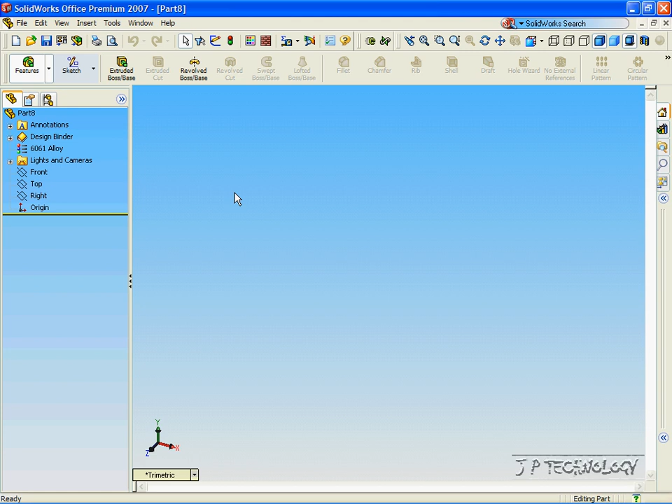So to start off, let's sketch something on the front plane. Click Front Plane, click Sketch, click Circle, and let's bring it to the left, and make it go to the origin. Click OK, and let's make this circle 50 millimeters.

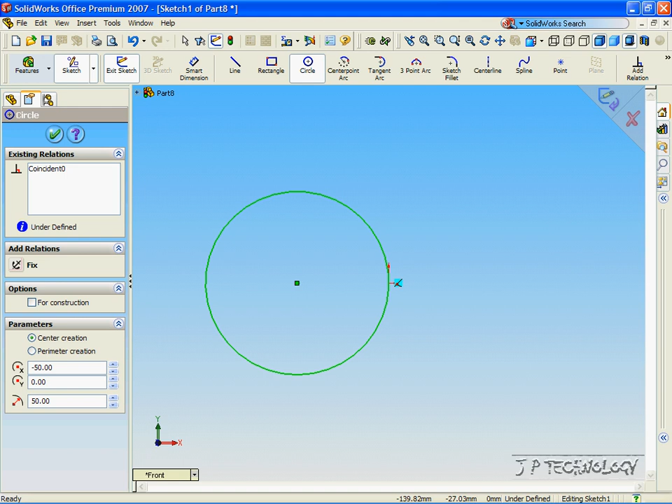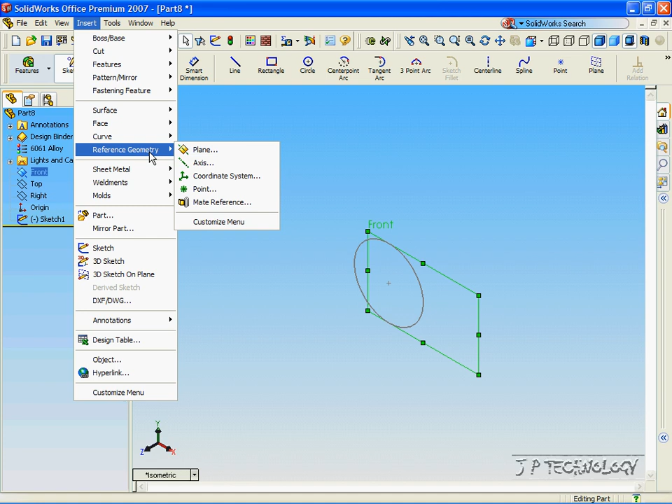Click OK, click OK. Now, to make the second sketch, click the front plane, click isometric view, and zoom out, and we're going to make a front plane that's parallel to that plane come out a bit more, and we're going to draw a sketch on there. To do that, click Insert, Reference Geometry, click Plane, and as you can see, the yellow plane is the one that we're going to put in, and it's parallel to the front plane.

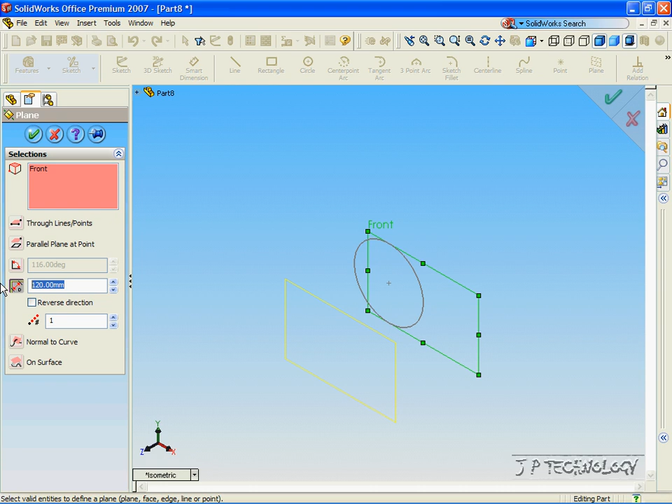Now, we are able to make it farther from the front plane or closer to the front plane, it's up to us. We're also able to reverse the direction of which way we want it to go. For this one, let's make it 100 millimeters. Click Enter, click OK. Now we've created another plane. Now click Front View, and let's sketch on this plane.

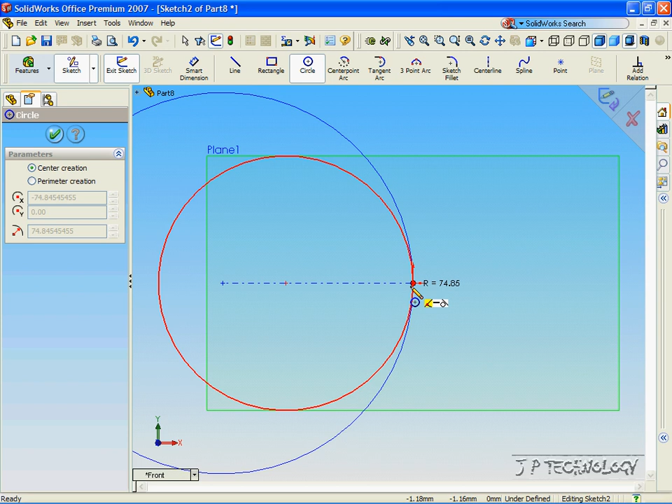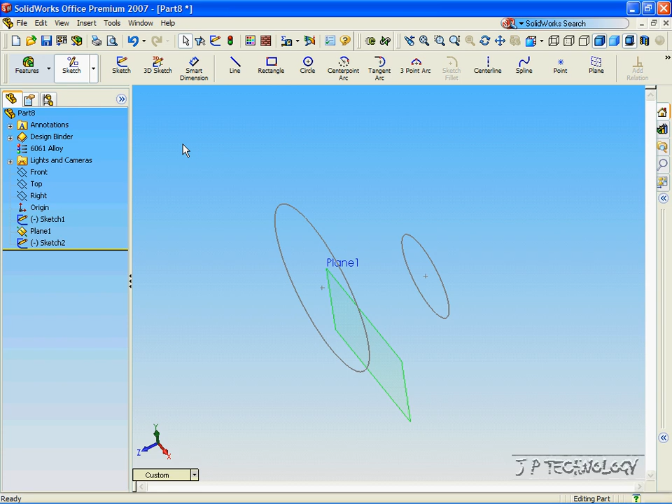Click Circle, go to the left of the origin, and for this one, let's make a circle that's bigger. Click the origin, and we'll make this circle 100 millimeters. Click OK. Now go into your isometric view, and you can see that we have two sketches which are parallel to one another. And what the lofted base feature is going to do is create an extrude between these two sketches.

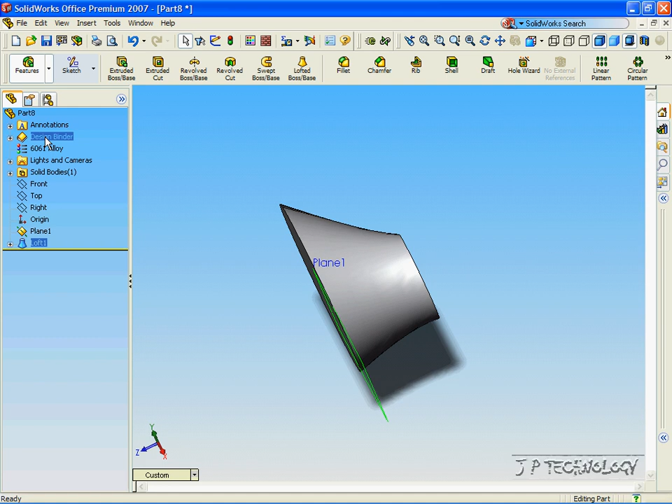So let's click lofted base, click the two profiles, and as you can see, that's our sketch. And that's going to be the extrude that we're going to get from the two. Now click OK, and we have our extruded loft. Now once again, we're able to manipulate this extrude through the sketches.

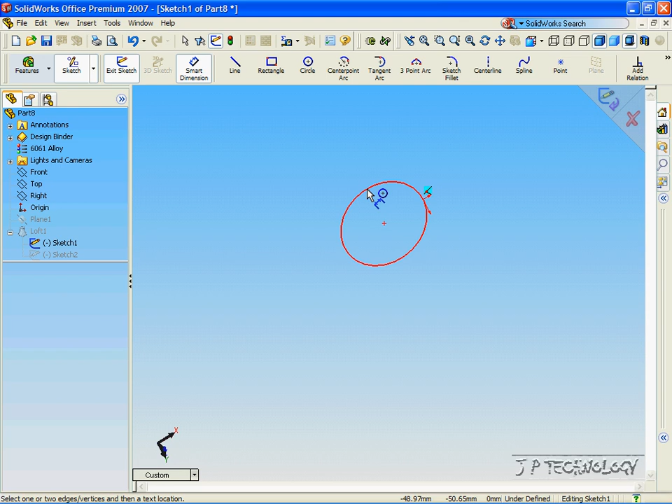So let's open up the loft, let's edit sketch 1, click Edit Sketch. Using Smart Dimension, let's make this circle smaller. Let's make this circle 20 millimeters. Click OK, and now it's rebuilt to that. Now this concludes our tutorial.